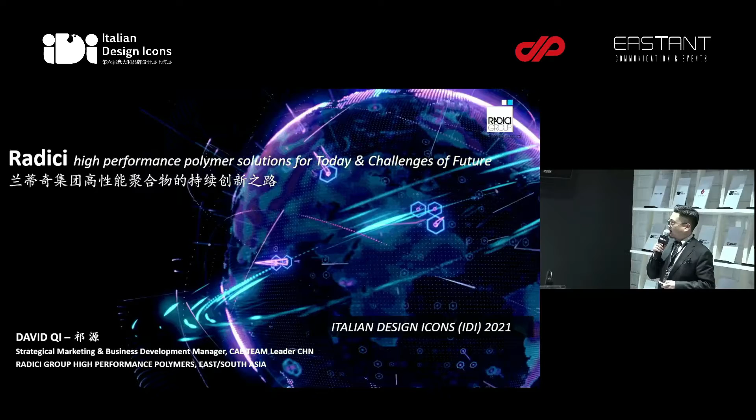Good afternoon, everyone. Thanks to IDI and also Eastant. I'm very honored to be here, invited to present who we are, what we do, and how we can do better with our customers together. I'm very pleased that I'm the only Chinese speaker today for the first one, especially thanks to the good relationship between China and Italy.

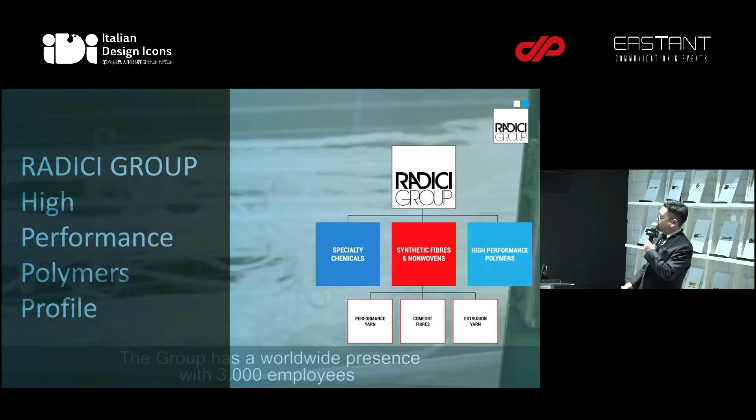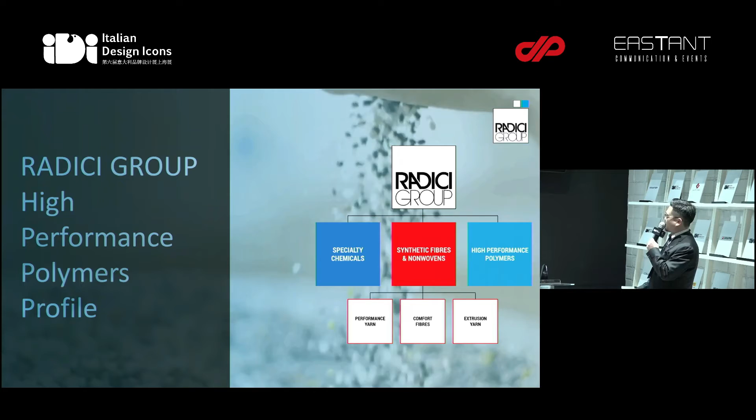First of all, please allow me to introduce RadiciGroup. As you can see here, RadiciGroup has 3 business units: specialty chemicals, yarns and textiles, and high performance polymers. In 2020, our sales turnover is over 1 billion euro.

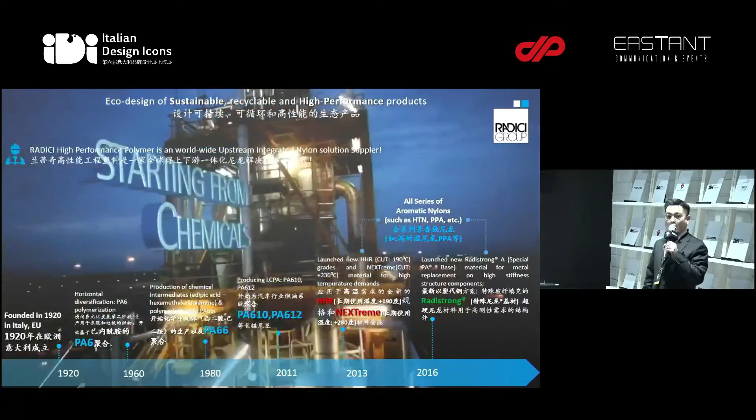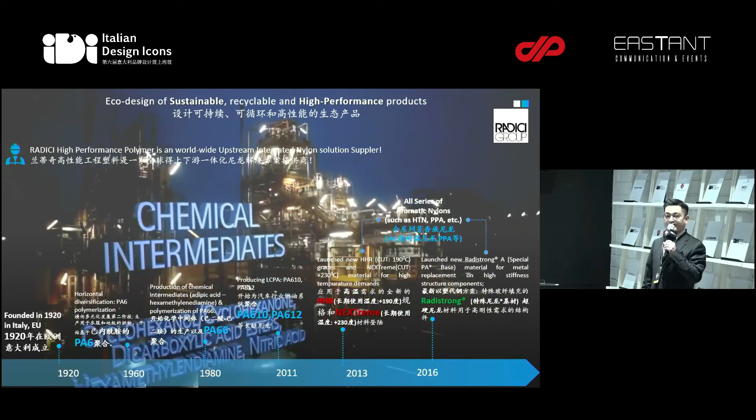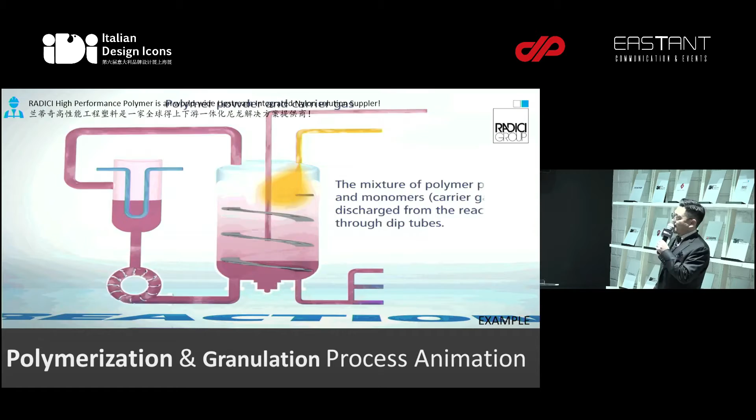Here's our history. We were established in 1920 as an Italian company, and from 1960 to 1980 we started our own implementation of PA6 and PA66. From 2013, we launched a whole series of aromatic nylons, including high temperature nylons and PPA. I would like to give you a small hint about how the polymerization process works.

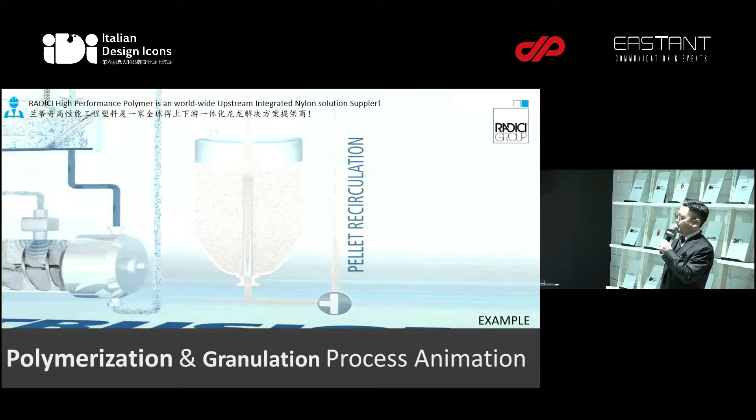We put the catalyst and raw material into the reaction tank to polymerize PA6 and PA66, and then we use extruders to produce pellets for the next compounding procedures.

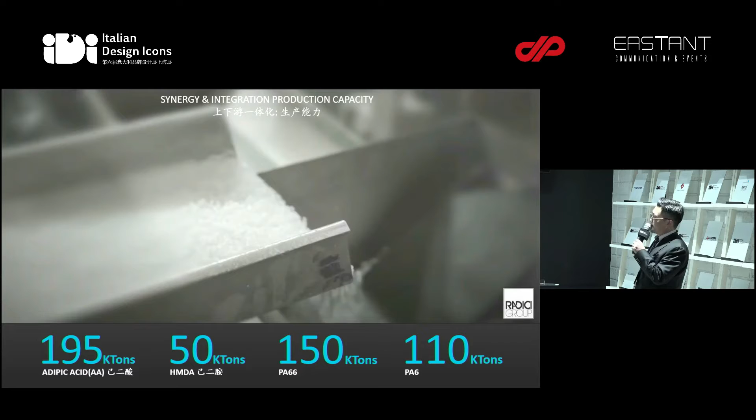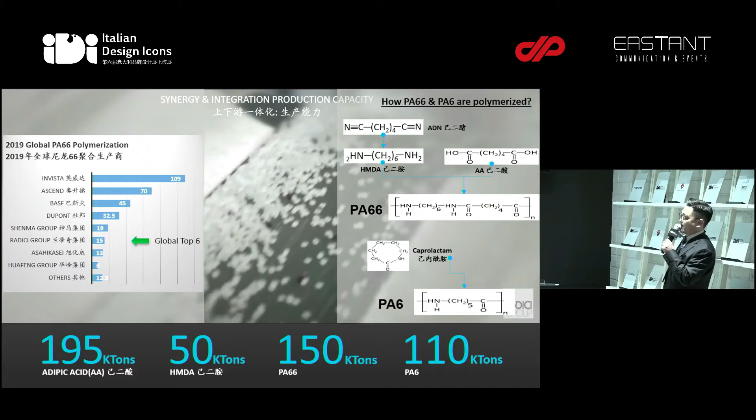Here is our global capacity for upstream products. For the polymerization of PA66, we are a global top 6 manufacturer, so we can maintain very stable supplies of our materials to global customers.

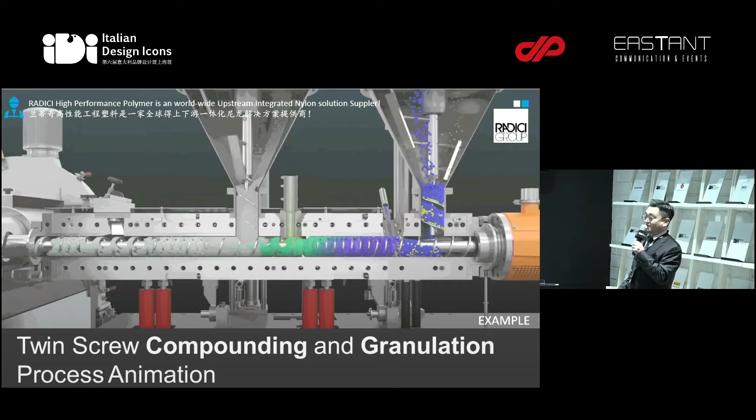Here's how we compound materials to supply our customers in China. We put raw materials into twin screw compounding lines filled with fillers like glass fiber or other additives, and to granulate, we extrude it - we call it the spaghetti - and then cut the spaghetti into pellets for our customers to use.

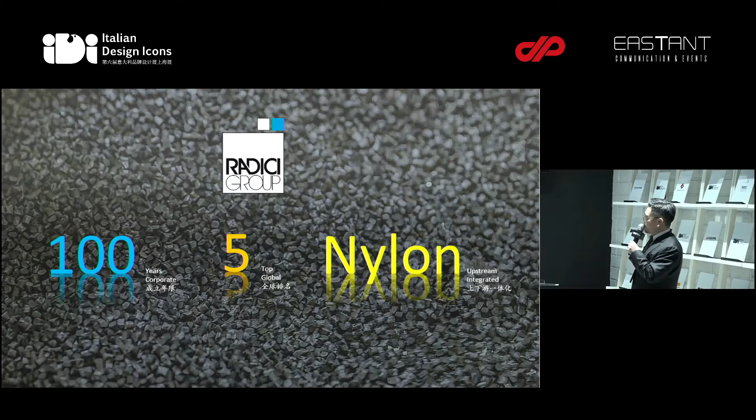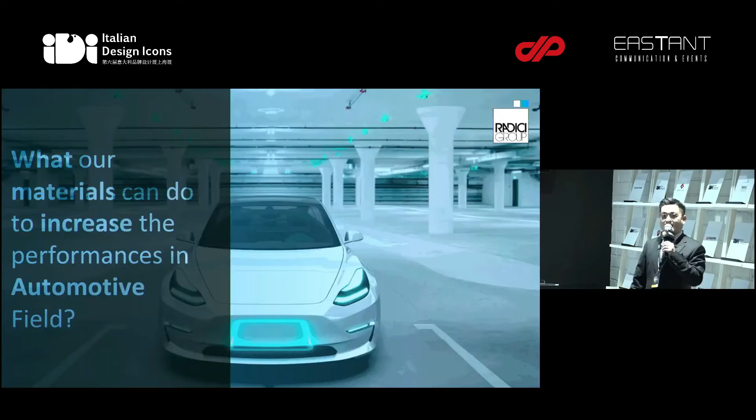In summary, as an upstream integrated nylon supplier, we are top 5, with over 100 years of history. As a raw material supplier, we invest a lot to increase our material performance to meet our customers' product needs.

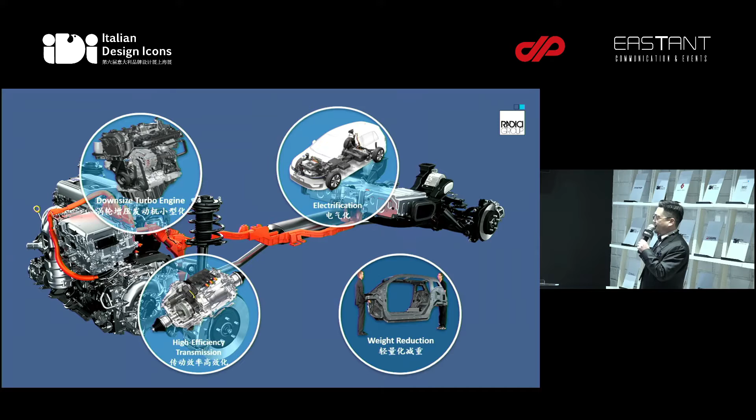As you can see here, these 4 topics are the hottest topics in the automotive industry, for example weight reduction. We know there's a lot of plastic parts in interiors and exteriors, and we also help our customers make plastic parts to replace metal in chassis and powertrain systems.

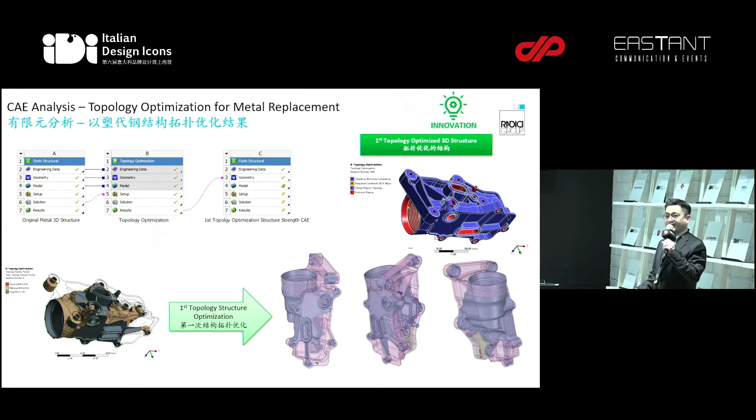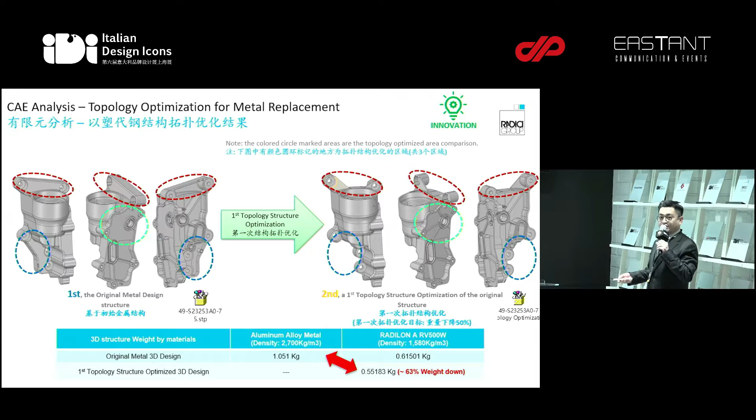Here is a very good technology we call topology optimization. We get the 3D CAD of the metal part from our customers, so we can help them run topology structure optimization to find out which are the core parts or areas needed to survive the CTQs of the working conditions. Then we can revise and optimize the structures from metal designs to plastic designs to reduce weight.

Besides, as we all know, plastic materials' ultimate stress at break is much lower than metal, so that is a worry coming from our customers - how can I use plastics to replace metal since the stress is much lower? Actually this can be addressed by different structures with a lot of ribs. So you can see here, even for plastic parts, we can achieve the same load structures above 70,000 newtons, meaning 7 tons impact for plastic parts. This can be a very good weight reduction target for our customers.

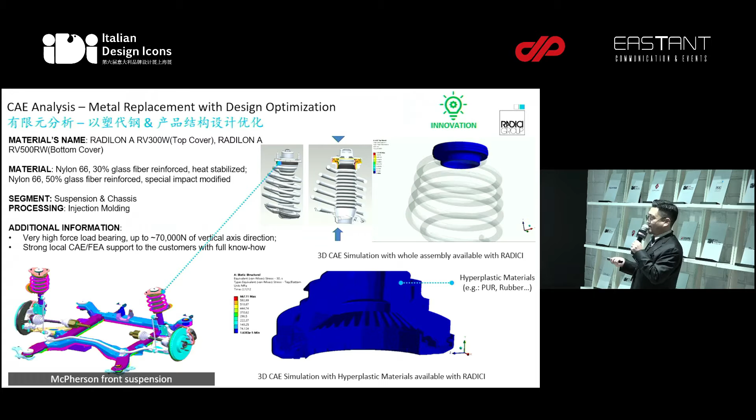Meanwhile, in China we can also help customers run CAE analysis with the whole assembly available, and also hyper-plastic materials with 3D analysis.

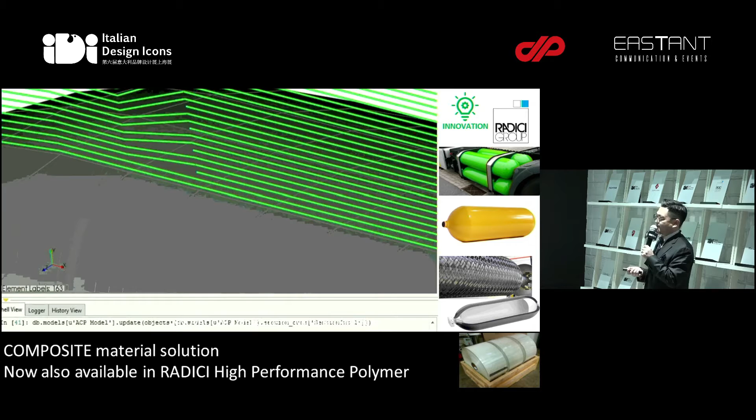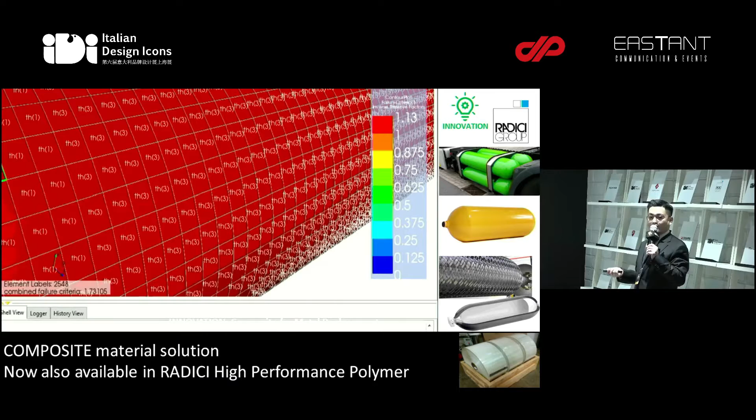This is another innovation product we launched recently, we call it composite laminate. Here is an example - we help our customers run CAE analysis for a hydrogen tank. Basically this tank is produced by metal and the weight could be around 30 kgs, but using composite materials, the weight is only 6 kgs or even lower.

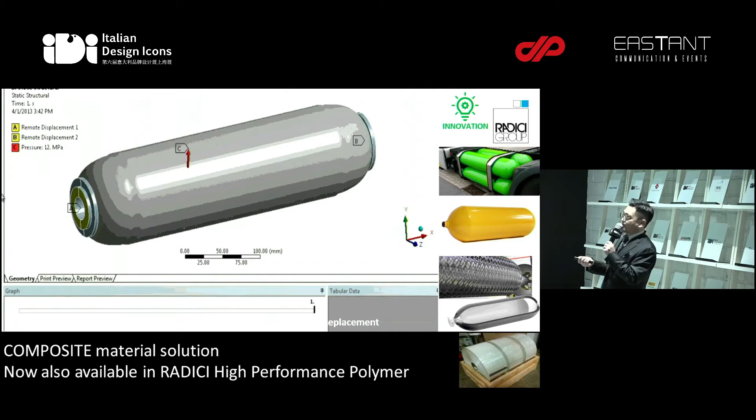We use CAE analysis software to help customers design different layouts of the laminates around this tank to achieve cold temperature burst pressure tests up to 75 megapascals, which bears higher pressure compared with metal.

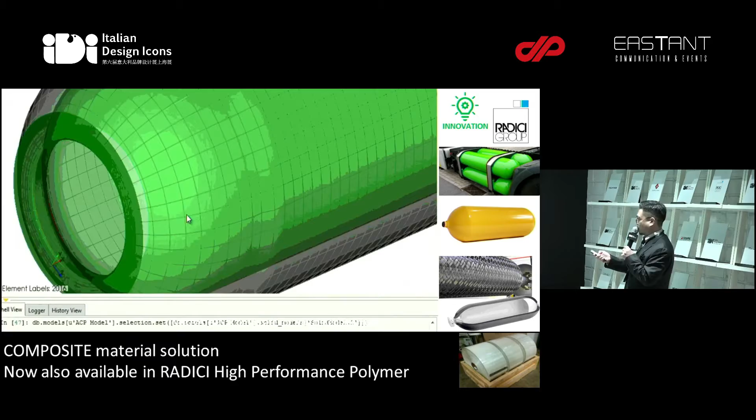And the weight reduction could be very good for our customers. So then we think about the downsized engines. The engine area is the main area where polyamides are widely used.

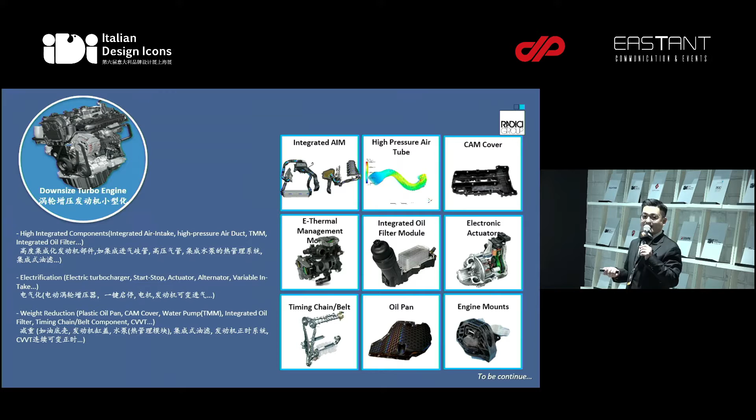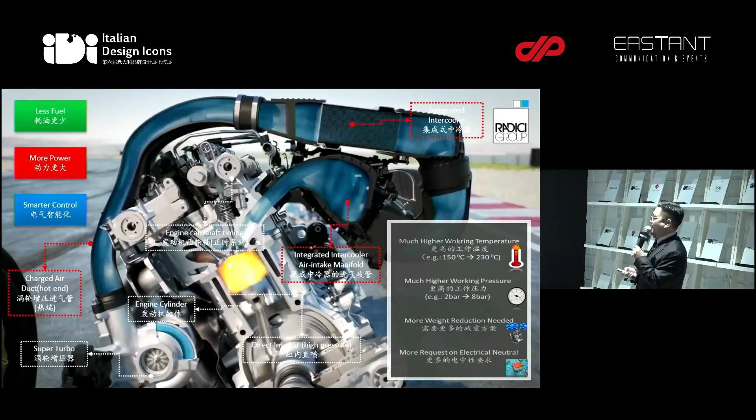Nowadays, I'll show you a very small video. You can see here the engines, and you can see that the downsized engines require using less fuel and generating more power. So that gives us, the material suppliers, a big challenge, because the working temperature is going up very sharply, from 150 degrees Celsius to now 230 degrees Celsius. And working pressure is also 4 times higher than in the past.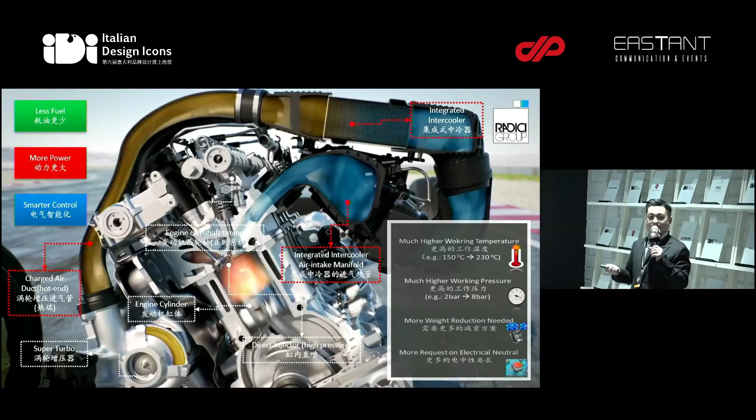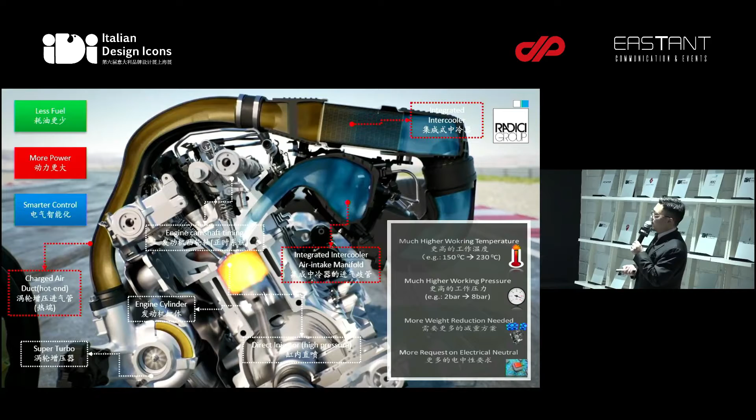So the materials need to bear higher temperatures to maintain very good strength after long-term heat aging. Okay, so here I can show you that 3 years ago, we successfully launched the high temperature nylons. We call it NeXTreme, our high temperature, super high temperature nylon. We can see that these materials can keep very good strength after a long time of heat aging at very high working temperatures.

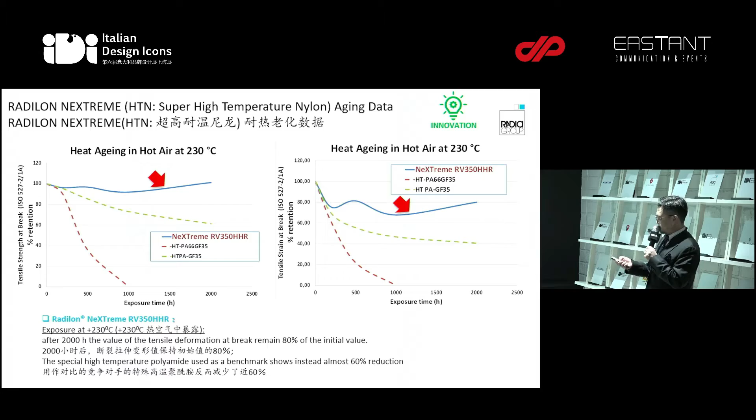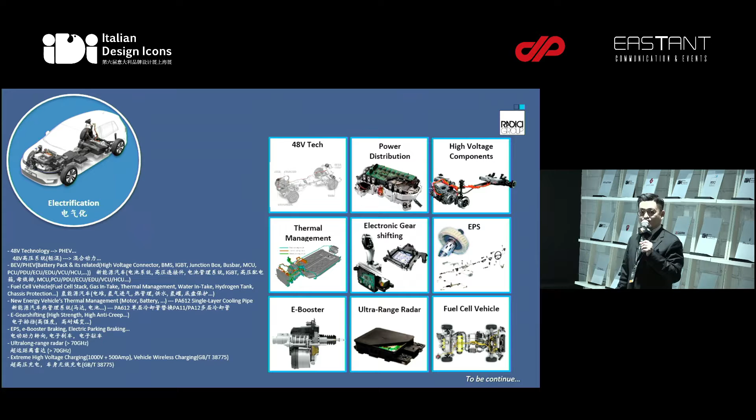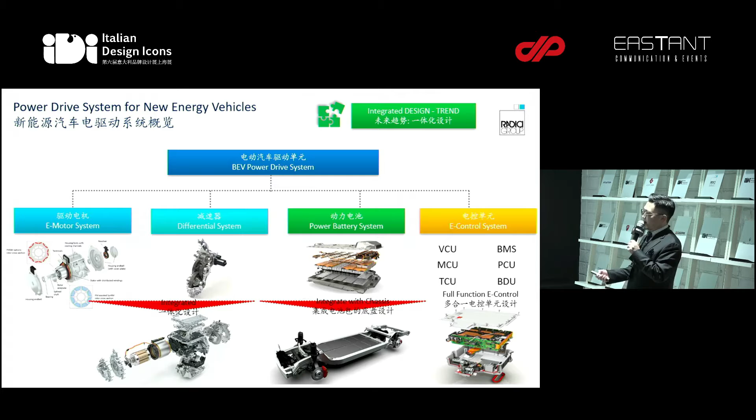And then the third topic is electrification. As we all know, due to the new energy vehicle development boom, and also the 48V technology, there are a lot of requests for electrification of components in vehicles. Here is a summary of the new energy vehicle system, mainly 4 parts: e-motor, battery, and control.

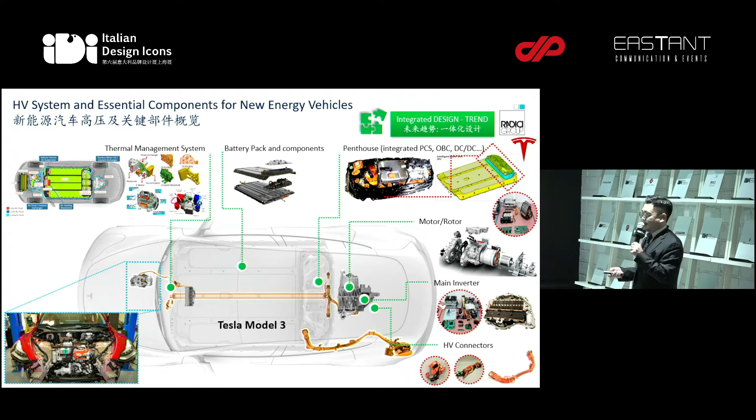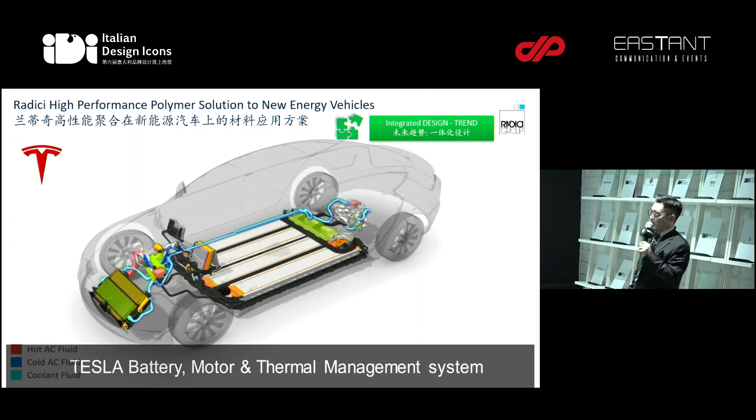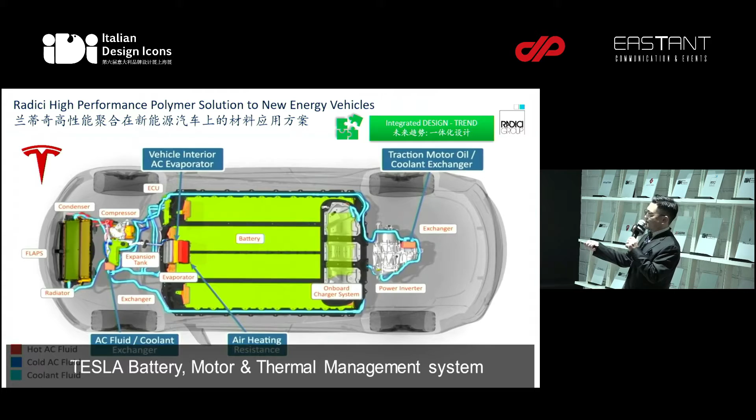And this is the new, we call it the second era of new energy vehicle development, in China and globally. I would like to show you a video about Tesla. As you can see, Tesla's new design of the powertrain is quite compact and very simple. There are only 3 parts: here is the heat pump system, battery system, and e-motor system. They put all the e-control systems compacted or integrated into the battery so far.

Okay, so now the heat pump technology is an innovative technology for new energy vehicles, because in the past we all know that end users of new energy vehicles would not turn on the air conditioning at cold temperatures. This technology mainly focuses on PTC preheaters, which can consume at least 30 to 40% of your battery capacity. That is the reason why most end users would not like to turn on the air conditioning in the winter season. But with the heat pump, you don't need to consume any energy from your battery.

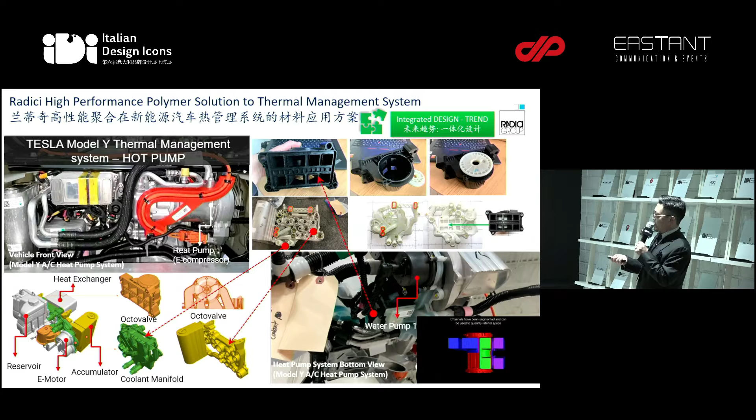And this is the new technology, and here's the part we produced for our customers. This technology is complex, but I want to make it simple for you. Here you can see there are 4 loops. The first loop is the battery loop, meaning the battery thermal management system, including heating and cooling, the e-motor heating and cooling, the front radiator heating and cooling, and air conditioning heating and cooling.

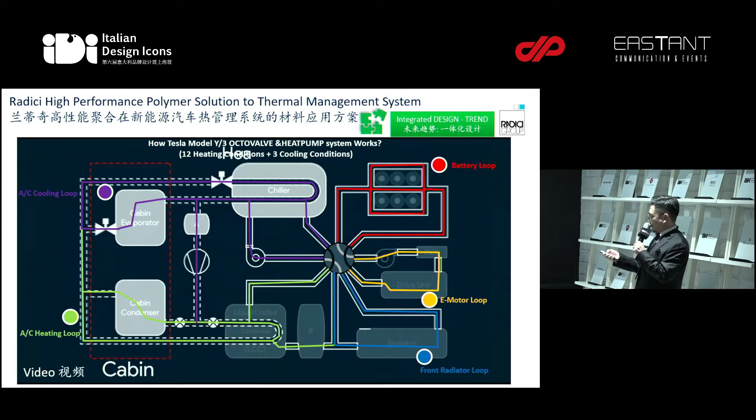So basically, in the past, these 4 loops were totally separated, not connected together. But now, with the heat pump technology, we can use a control valve here to connect all these loops together. This means that when you drive the vehicle, and the battery is heated up and needing cooling down, you can use the coolant from the battery to transfer heat to your air conditioning system to generate heat for warming up the air conditioning. So you no longer need to use electricity power from the battery. That is the key reason why I'd say 80% of OEMs are now transferring from the old PTC technology to heat pump technology.

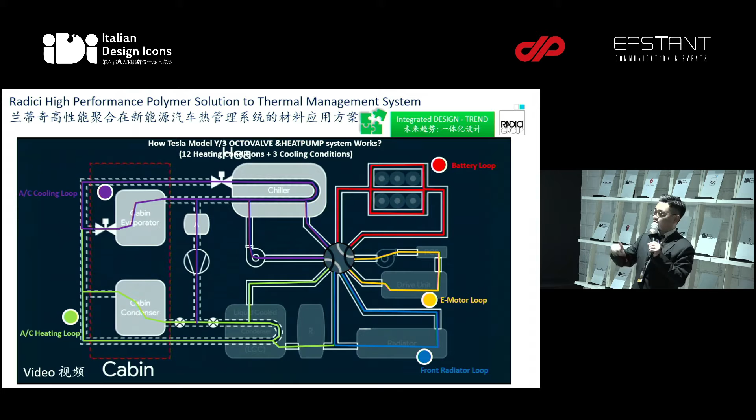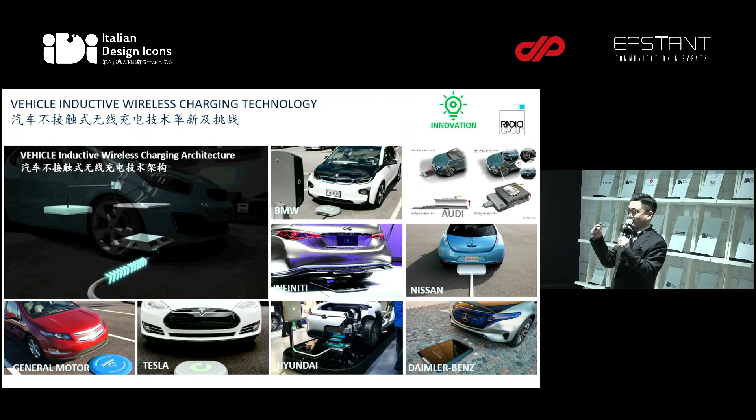And here I'm very honored and pleased to announce that, as a raw material supplier, Radici is the global first, and by now I think the only one, to successfully work with our customers to launch the first vehicle inductive wireless charging component in China, and globally.

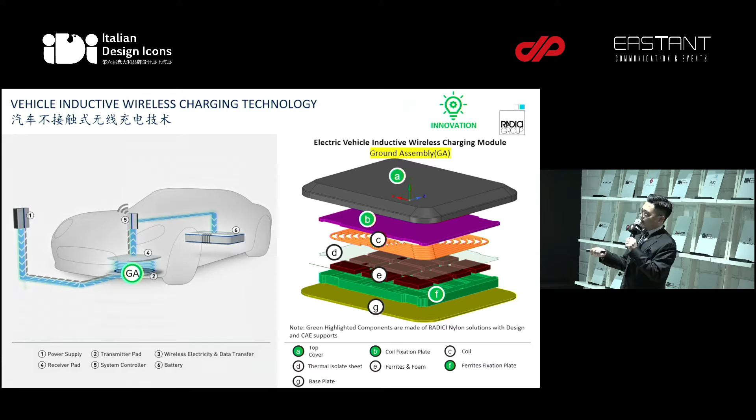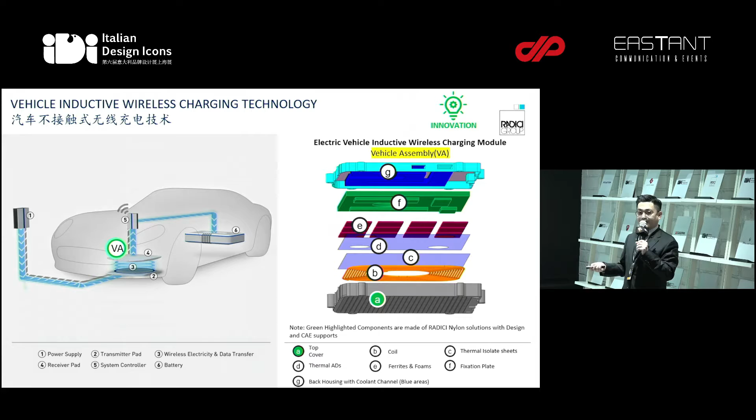So here is the architecture, or the exploded scheme, of the component. We call it the ground assembly. This part generates the magnetic field through electricity power, and then there's another part, which we call the vehicle assembly. This part receives the magnetic field to generate electricity to recharge your battery or power the vehicle.

So we help the customers define the electrical properties, trying not to block the magnetic field strength. Meanwhile, we also help customers run dynamic thermal analysis to try to optimize the structure to maximize heat dissipation, just like the former speakers were talking about with the LED.

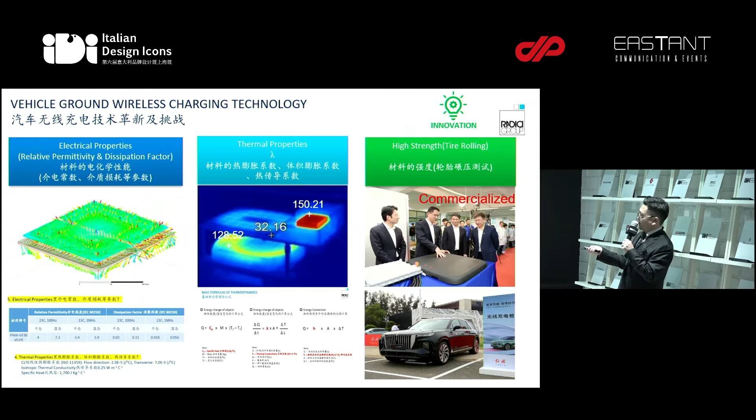This is the same theory. And this is the first global one, the FAW Hongqi EHS9 vehicles, and this is the part with our materials. A very important thing is that these customers require very restricted strength of the component.

So we have to do a lot of design with ribs, as you can see here in the CAE simulation we ran for the customer. With the tire rolling at a speed of 10 kilometers per hour, the weight is 1.35 tons, which means the vehicle weight is 4 times higher than this 1.35 tons.

And the customer requires that when the tire rolls onto the surface of the component made of these plastics, the vertical deformation needs to be within 1 millimeter. That is very hard, so we helped the customer redesign the ribs to achieve that, and now it's commercialized.

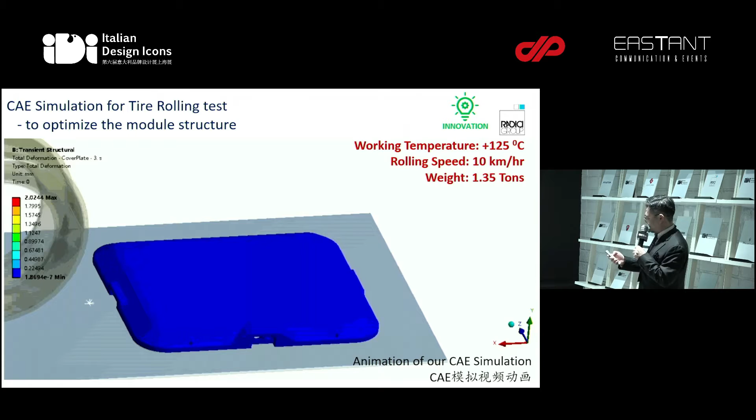I introduced who we are and what we do, and now I want to introduce how we can do it better with our customers.

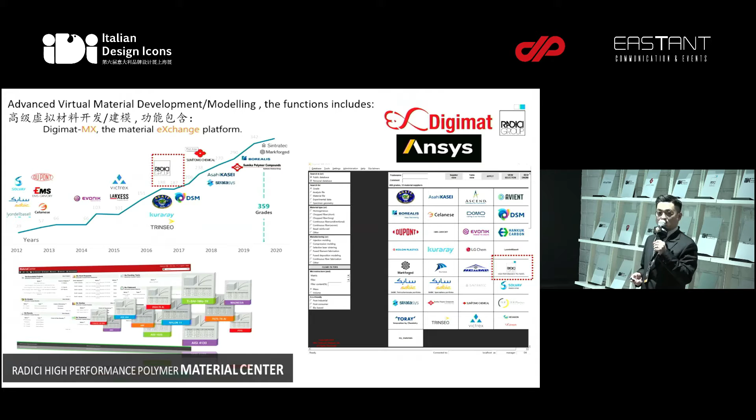First of all, as a raw material supplier, we have to expand our data available for the materials our customers use. As you know, the global famous CAE software or material center is called DIGIMAT, and here are our materials' validated numbers among our competitors or partners. We're very top 10.

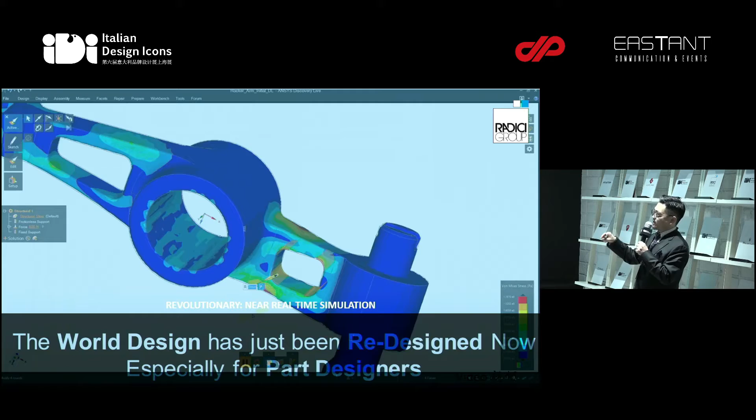We can use our software's function to achieve near real-time simulations, meaning that for some parts, we can redesign the structures and the results come out simultaneously. You don't need to wait 1 hour, 2 hours, or 2 days.

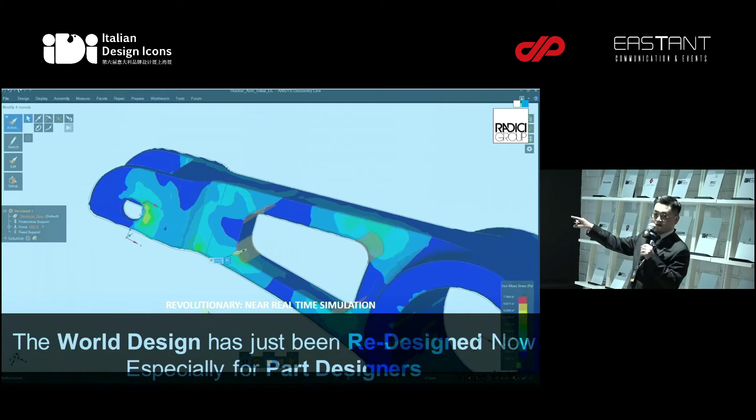For example, if I cut off a hole, the stress result or deformation result will come out simultaneously as you change the structure. So we have these capabilities to help our designers redesign and quickly design the part in real time.

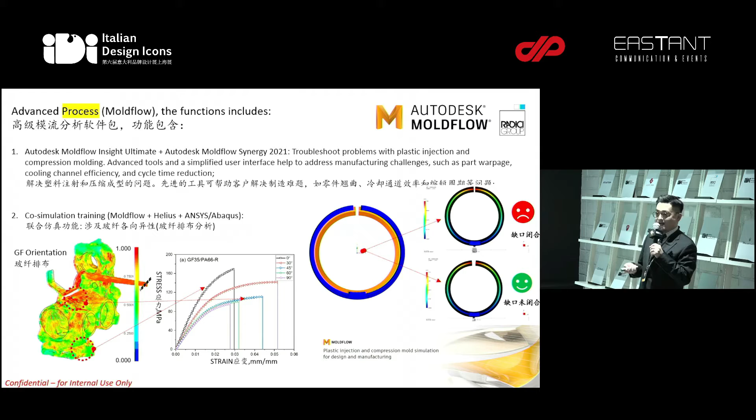Besides, we can also help our customers run Moldflow analysis, not only to solve injection process optimization, but also to adopt pre-shrinkage or pre-deformation technology to solve problems like gap closure. We can solve that, and meanwhile we can also link the manufacturing process with the part function.

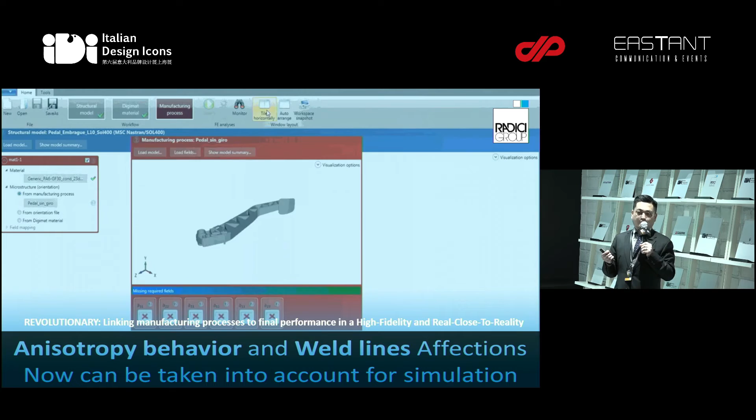We know that during the manufacturing process there are a lot of unavoidable defects, but when you do CAE analysis, you cannot take that into account for the part design. Now we have models to link the part design with the manufacturing process.

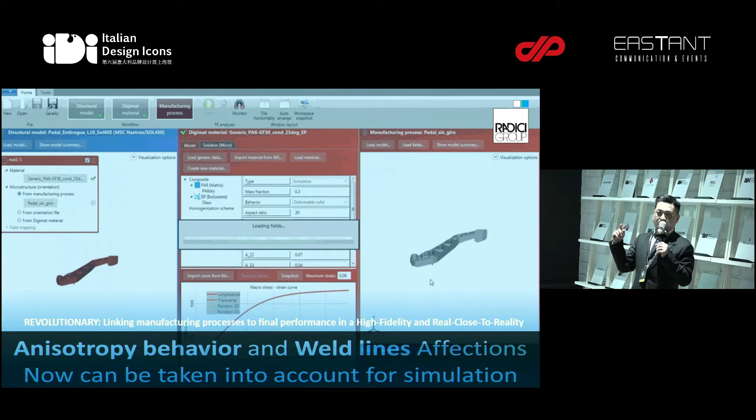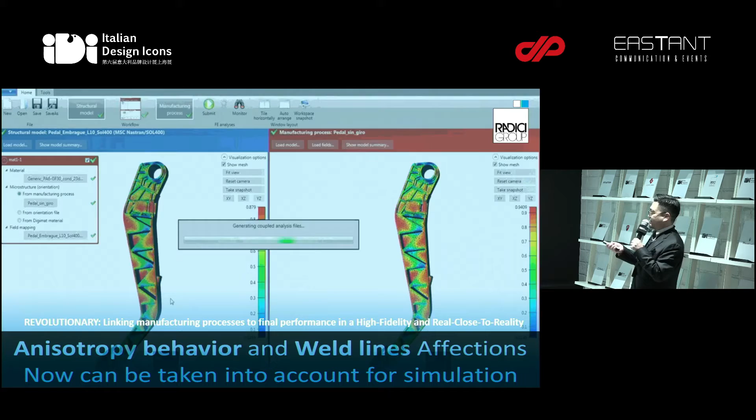We can take the unavoidable defects caused by the manufacturing process into account for the part design, to achieve results really close to reality. So you don't need to worry about any defects from the manufacturing process anymore.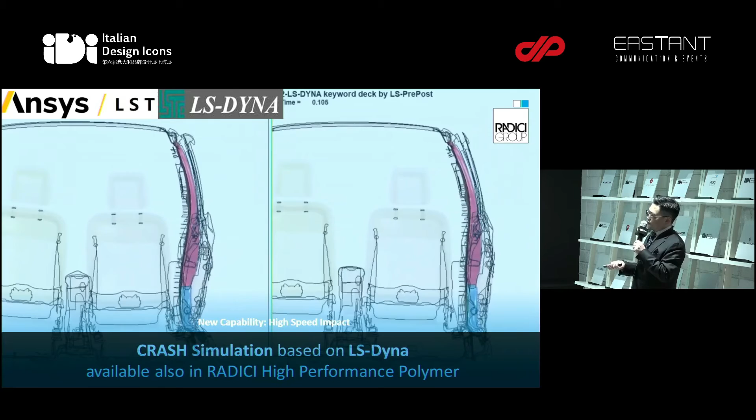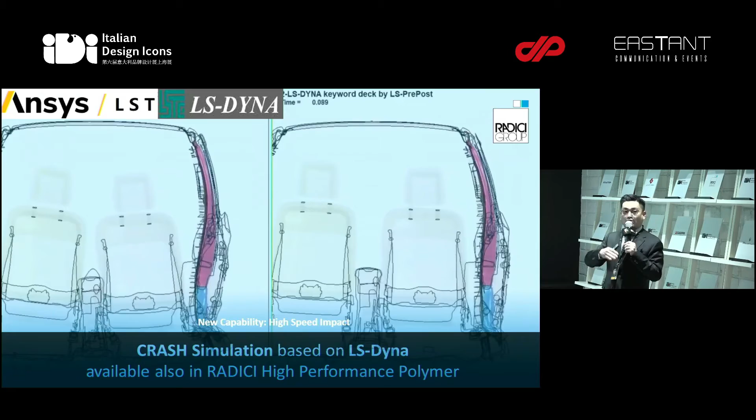Besides, last but not least, 2 years ago we also launched our capacities for design for high-speed impact. Now, for most of our materials, we also provide high-speed data for our customers to use, because as you know, materials behave totally differently at low-speed impact versus high-speed impact.

So we now also provide data for high-speed strength and help our customers run crash simulations as well.

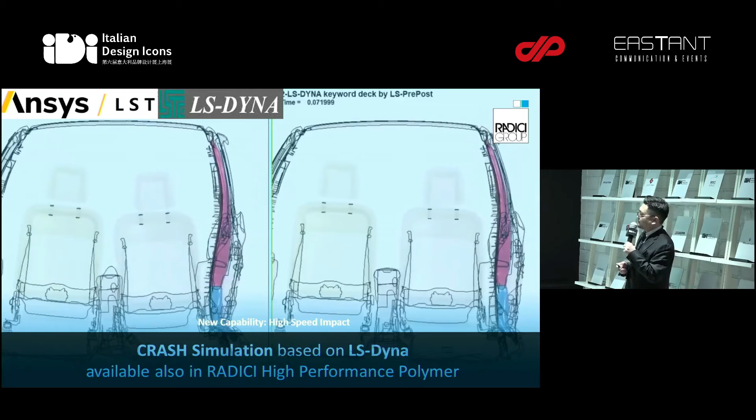Radici, as a global nylon integrated solution supplier, doesn't only supply materials to our customers. As you can see, we have fully developed functional teams to support our customers, for example our sales team to support pre-sales and post-sales service.

We also have the BD team and marketing team to supply customers with system or market benchmark reports. Besides, we have the CAE team to help customers co-design and validate parts with our materials, and also local product R&D centers, so we can develop materials based on customer requests locally, with very quick feedback.